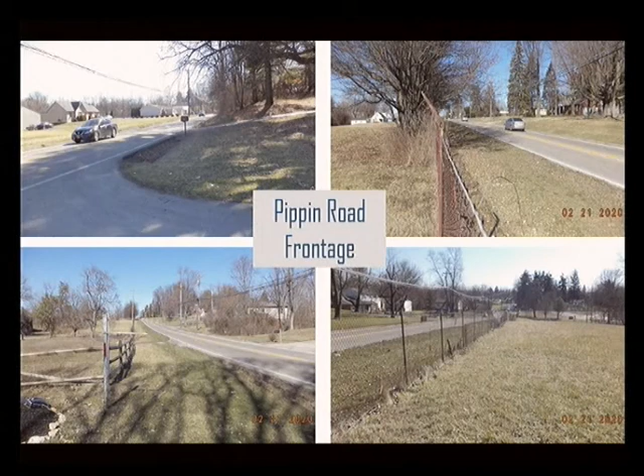The site in question is currently zoned PDR. The areas surrounding the site are currently zoned R6. That's an urban residential zone that permits single-family residential dwellings, two-family residential dwellings, three-family residential dwellings, and four-family residential dwellings.

And so where are we today? Well, the plan development process, as you all know, is a two-step process where there's a preliminary development plan submitted that is reviewed by the Zoning Commission. They make a recommendation to the Board of Trustees, who takes final action. This development plan, or this specific application, went through that process and was approved earlier this year. Where we are tonight is the application on a final development plan. This is more of an administrative review where the applicant submits an application, staff does a review, and then the Zoning Commission hears the case and then takes final action to approve or deny.

The development conditions from the preliminary development plan are as follows. Number one, the applicant must either construct a public sidewalk or secure a waiver from the Board of Trustees for the Pippin Road frontage to make sure the property is in compliance with all applicable design standards.

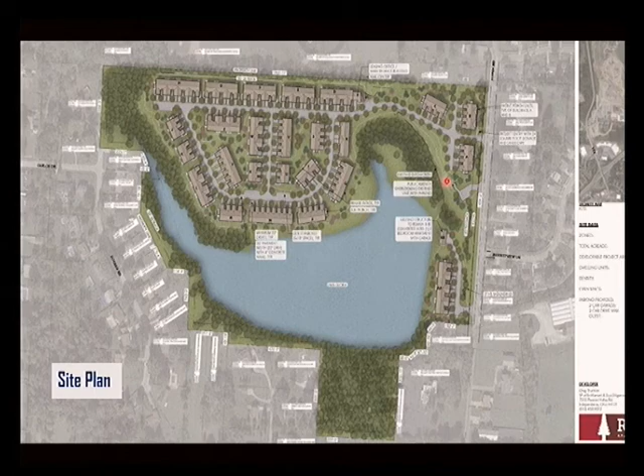Access is still provided from those 3 curb cuts along Pippin Road, and there is still a gazebo for public viewing located off of Pippin Road. And again, you can see the 3 access points here, and you can see the gazebo right here.

The applicant has submitted a landscape plan that indicates the following. They've shown the provision of various deciduous and ornamental trees planted throughout the site, done in accordance with the preliminary development plan. They also show the provision of bushes and shrubs throughout the site, and the preservation of significant natural and open space areas, particularly on the south side of the site in question, all in keeping with the preliminary development plan.

I do want to bring up one comment pertaining to one of the conditions. If you look up here, the applicant has included additional plantings next to building number 8 along that north property line, and they've added 3 trees there to provide additional buffering and screening from that adjacent single-family residential use. They also indicate that they will preserve and maintain the buffer along that north property line.

I do want to note that the proposed landscape within the site is not a direct requirement of the zoning resolution. If you look at table number 14.1 of the zoning resolution, it doesn't really provide any guidance for screening when you have a PDR adjacent to a residential use. In fact, PDR is not contained on that table.

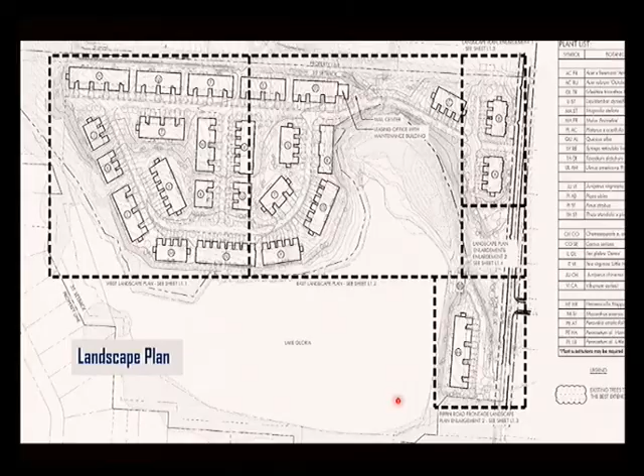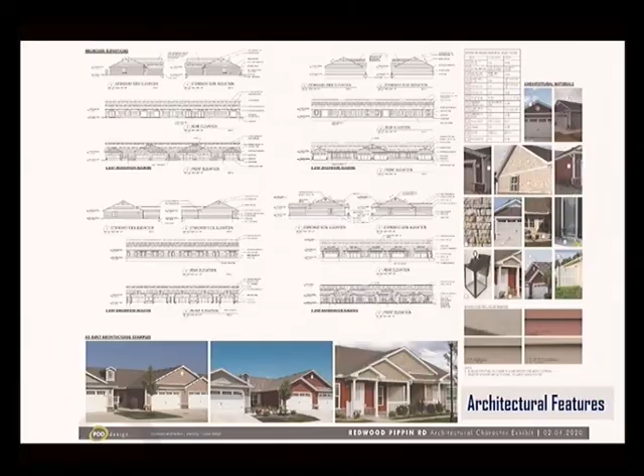The exterior materials of each unit, as in the preliminary development plan, are again composed of brick, masonry, and vinyl. The building exteriors also feature multiple gable architectural accents, a mixture of siding materials, as well as the lighting and fencing accents that were submitted within the preliminary development plan.

Each unit will feature 2 bathrooms and 2-car attached garages. There will be a full range of appliances, including refrigerator, stove, dishwasher, garbage disposal, and in-unit laundry. The units will have vaulted ceilings and granite countertops, and again, they're maintaining the quality that they applied for and promised in the preliminary development plan.

And again, here you can see additional photos of the proposed units.

In making their application, the applicant has also indicated the following. As it pertains to the sidewalk, and there was a condition about sidewalk, the applicant has indicated, though it's not shown on the site plan, that they are intending to construct the sidewalk at their cost along Pippin Road, including the sidewalk necessary to meet condition 1 and condition 2. Condition 2 was that the sidewalk would extend into the development up to a certain point, at the first intersection of the private drive on the north section of the development. So again, the applicant has stated that they intend to comply with all sidewalk standards, as well as those requirements outlined in condition 1 and condition 2.

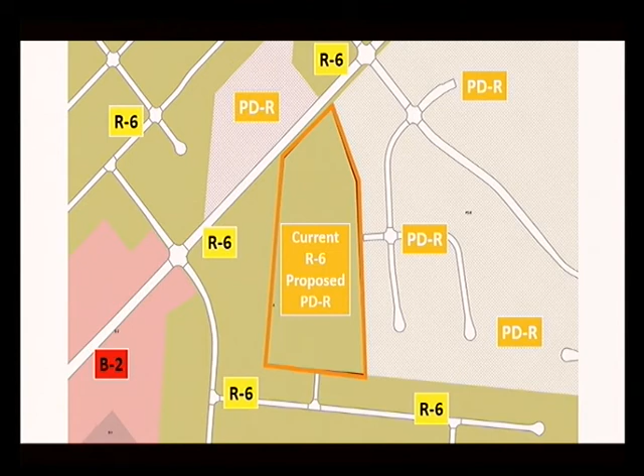The site in question is currently zoned R6, the same zoning as the areas to the immediate west and south. The proposed zoning is PDR, which is the same as the existing areas to the immediate north as well as to the east.

The intent of the PDR zone is to allow for residential development, and the intent of planned development districts overall is to allow for flexibility in the zoning requirements to get a higher quality development. It's to provide and locate recreation facilities, open space, or other common facilities while preserving existing landscape. The intent also is to encourage sound planning principles as it pertains to the site plan, preservation of open space, utilization of topography and other natural features on the site.

It's to try to obtain creative and coordinated designs with the surrounding areas and allow for creative development that conforms to the goals and objectives set forth within the comprehensive plan.

The plan development process is a two-step process. The first step is the preliminary development plan, where a concept is submitted with some of the ideas fleshed out. That's an application submitted to staff. We do a review, present it to the Zoning Commission at a public hearing, and the Zoning Commission takes action to make a recommendation of favorable or unfavorable to the Board of Trustees, who take ultimate or final action to approve that preliminary development plan.

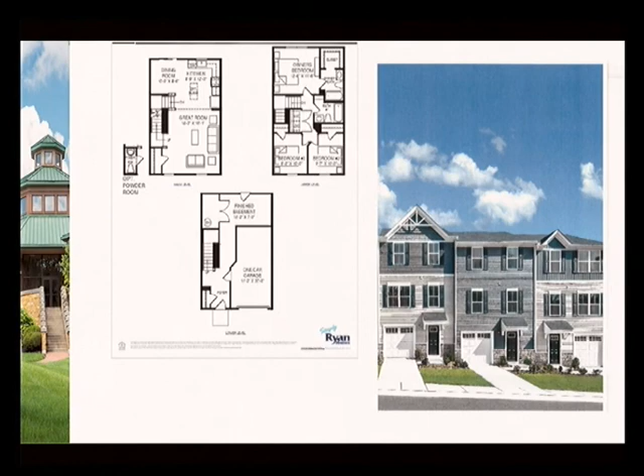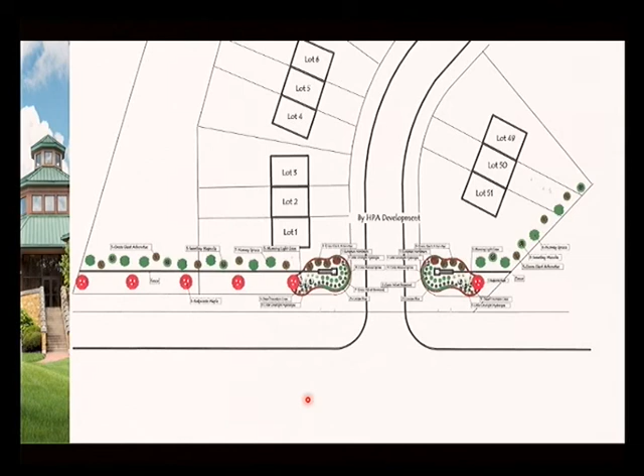The applicant has submitted a landscape plan that indicates the following information. You can see a significant landscape buffer has been provided along Springdale Road, consisting of trees and shrubs, providing almost a landscaped corridor along Springdale Road. The applicant has also indicated additional detail provided at the entrance on Springdale Road to provide a gateway into the site.

They've indicated that there will also be a stone masonry sign located at Springdale Road at that curb cut, and you can see that. Here's the location of those proposed signs.

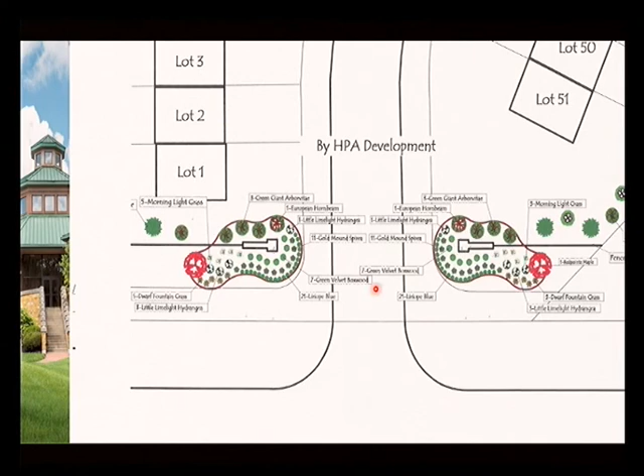So when you evaluate the proposal in comparison to the underlying zoning, the current R6 standard, the minimum lot size is very similar. The minimum lot width—and when you talk about that, I want to bring something up here, and that's the way the form and function of the development is proposed. As I mentioned earlier, the applicant, in order to meet the protocol they have for sale of units, has each of the buildings contain 3 units, broken up into 3 lots, whereas in actuality it really operates as one building, a larger unit.

But again, for the sake of sale, it's been broken up. So when staff did their evaluation, they didn't look at the units individually, but as the sum of their parts. If you were to look at the individual frontage here, obviously that would be deficient. However, that's not the form and function of what we have here. Unit 19 doesn't stand alone, Unit 21 doesn't stand alone, neither does Unit 20. They function as one connected, attached building.

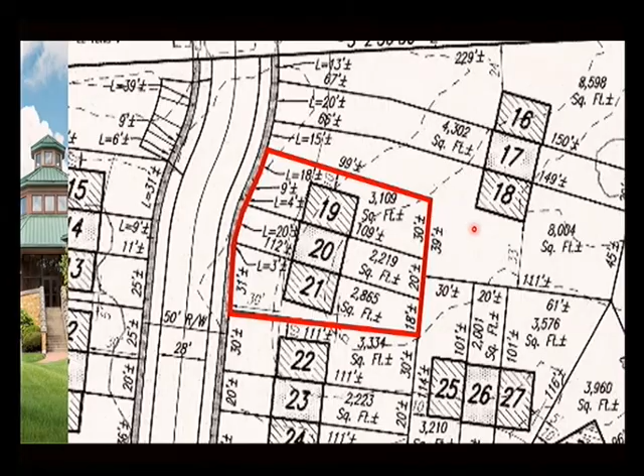Could you give me a definition of flag lots? What's that really mean? It depends on who you ask - they could be called a panhandle typically. Webster's: a true flag lot is where you have a lot that sits back off of the road and it's accessed through a stem or a drive access, which is sometimes called a flag pole or a handle, a panhandle. So it's a lot that sits back typically off the road, and it's accessed from a longer driveway. And those can have stems or flag poles that vary significantly in length. Okay, that helps.

Any other questions or comments for Mr. Iona before we ask the applicant to come forward? So I take it, gentlemen, you are the applicant? Okay, whoever wishes to come forward, if you would please give us your name, your address, and then for the record, if you'd spell your last name, please.

I'm Graham Parlin. I'm with HPA Development Group, 9091 Montgomery Road, Cincinnati, Ohio, 45243. My last name's spelled P as in Paul, A-R-L-I-N. Thank you.

So if you'd like to make your presentation, sir? Great, well thank you for having us this evening, especially in the crazy world we're all living in. I'm here tonight with Craig Grassi, representing Ryan Homes. I'm with HPA Development Group. We are a residential land development company, so my organization does not build homes - we strictly do site development. Ryan Homes is one of our larger customers that buys lots from us, so we do the site development, sell lots to them. So most of your development questions this evening can be directed towards me, and I brought Craig here with me as well to answer any specific questions you have regarding the product that they plan on building.

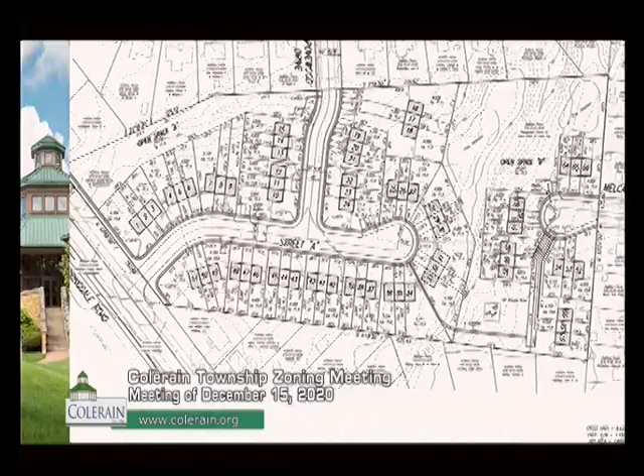If connecting is what we should be doing, since there's an existing stub there, the best traffic control we have is the stop sign at the intersection. I don't know the exact distance, but it's probably less than a football field's length between the intersection of Street A and Grovewood and the Grovewood stop. So you don't have a really long straightaway where you'd see a ton of people speeding. Will people cut through there? I'm sure they will. I don't know how you'd stop them from doing that.

I'm open to ideas, but if that's the quickest way to get somewhere, that's the way they're gonna go. I also worry that there's only two ways to get out of there, and one goes onto Springdale Road, which a little farther up goes with Colerain. Lori and I both see traffic backed up at least that far. Go out there on December 23rd at 6 o'clock at night and see what you see. So if those people need more than one way to get in and out of there, that just makes sense.

On December 23rd, they would choose to go Grovewood and hit the traffic light at Laura Linda. There will be a lot of it there at that time, but I just can't see one way coming out of there for all those people. That's a lot of homes.

It'd be 51 units, and obviously we would defer to the traffic impact study to drive what would be needed to do that. But if you guys live there, I'm gonna take your word for it. If on December 23rd it's backed up that far, you're gonna know better than I do—really, any Friday night, trying to get onto Colerain Avenue.